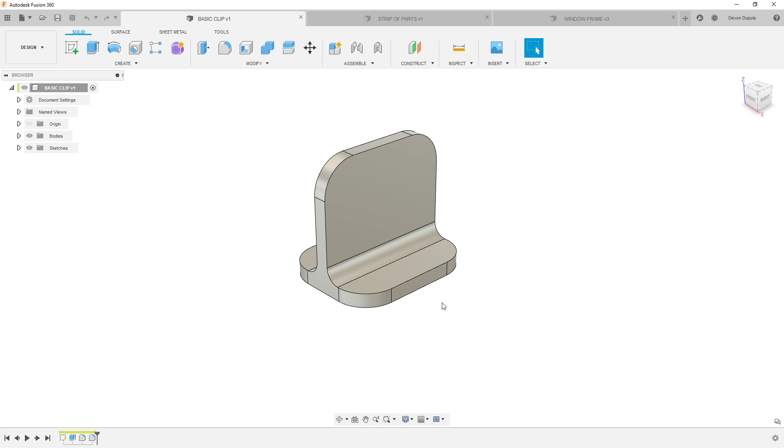Here on this first basic part, we're going to go through and I'm going to show you how to tab this. We're also going to walk through kind of how I would program this, because this is a pretty simple part. So once we get our part open, we just go from here to manufacture.

I'm going to hop in here and make a setup. Now this manufacturing method I'm about to do is really good if you don't have a lot of extra stock. Generally, when we're doing tabs and stuff like that, we need to have a lot more material, and that's the hold on the part. So we're really sacrificing, kind of making a fixture to hold our part, to get that ease of use to just make one or two parts maybe. This is a really good method for that.

In this case, I'm going to go here and set up my stock. I'm going to go to fixed size stock, and I'm going to have this round up to the nearest half inch. That way we get some clean numbers there.

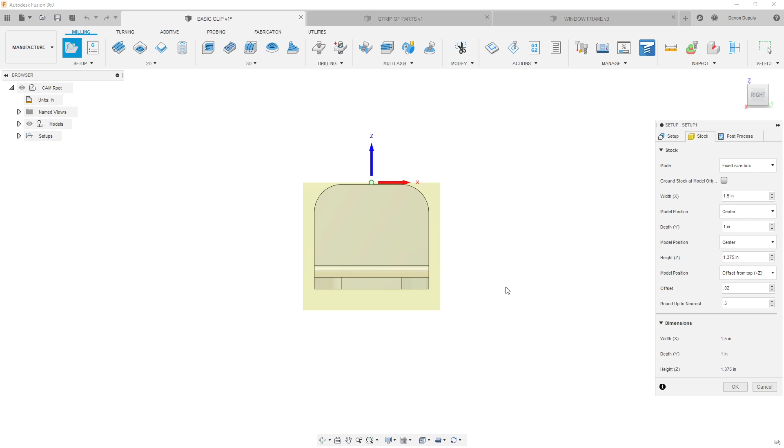Now what I want to do here is, if we don't have a lot of material here, maybe we could try 1 1/4, so maybe 0.25. You see we don't have much room underneath the part, so that really doesn't give us a lot to hold on with. We can make this like 20 thou offset from the top, and then we only have a little bit of material here, and we're going to try to work with that. We could bump this up to maybe 375, and that might give us kind of what we want. So really the goal here is to tab this part off and not use a lot of extra stock.

Once I have this all set, I'm just going to hit OK. How I would do a part like this is generally I just start off with a 3D adaptive, and I'm going to come in here and grab a tool that's long enough. I have some of my values already set in here, the way I want to machine this, and we can just hit OK on this.

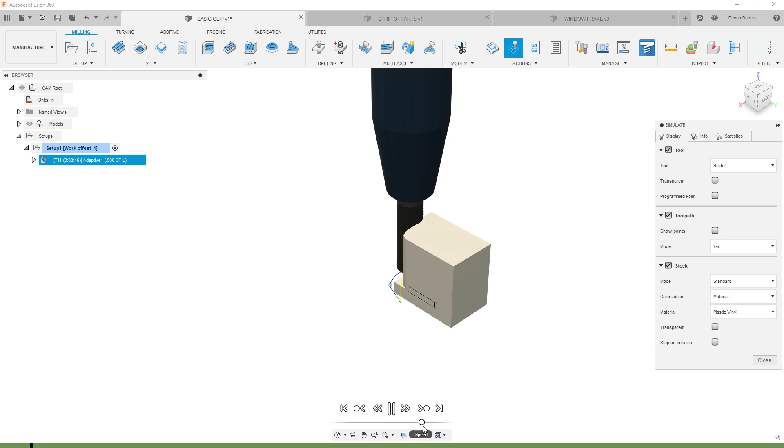This is going to kind of run around the part there. We can simulate this to see what our progress is if we want to take a look at that, and that'll give us a better idea of what we need to do next. So let's turn some settings on here and we can play through this. All right, so we're pretty good there.

What I would do then next is probably face this top. I'm just going to come in here for my stock selection and select this area just so we don't get a real big mess there. And then I do this often, and this is kind of a trick.

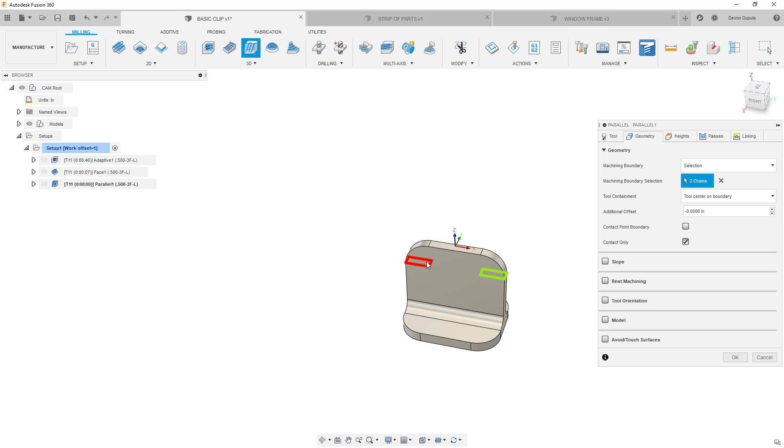These had a lot of material left on there, and I want to go in and finish these. I want to keep a constant tool pressure when I'm doing that. So what I'm going to do is actually use this parallel tool path, and I'm going to leave some stock on here. Let's come in here and leave like 10 thou. Then for my areas, I'm going to pick selection here, and let's grab this, and we'll grab this other side. We'll use contact point boundary, and we'll hit OK. We're not getting anything here, so let's see.

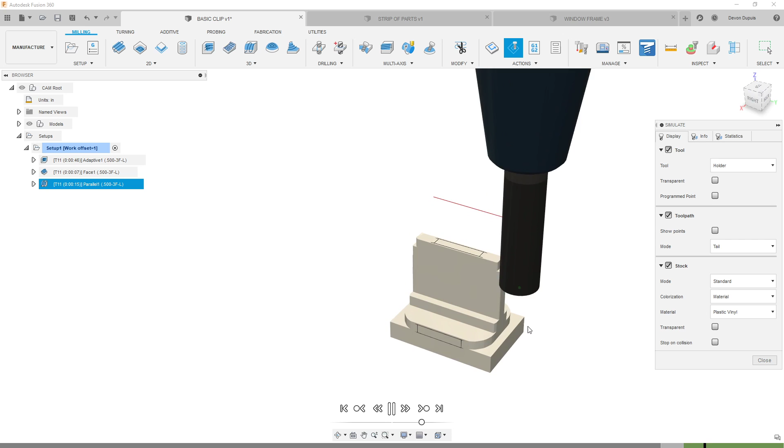So there we go. Now we've got a nice little rest roughing operation for our part. We can simulate that and take a look. Let's play through these - we can see this comes in pretty nicely and knocks off those big areas that we didn't have.

And then we can go right into finishing now. In this case, I'm going to use 2D contour to do this. We can come in here and grab this and this, and this and this. And then I want to make my lead-in be 0 degrees, tangentially extend these like maybe 100 thousandths. We can hit OK with that.

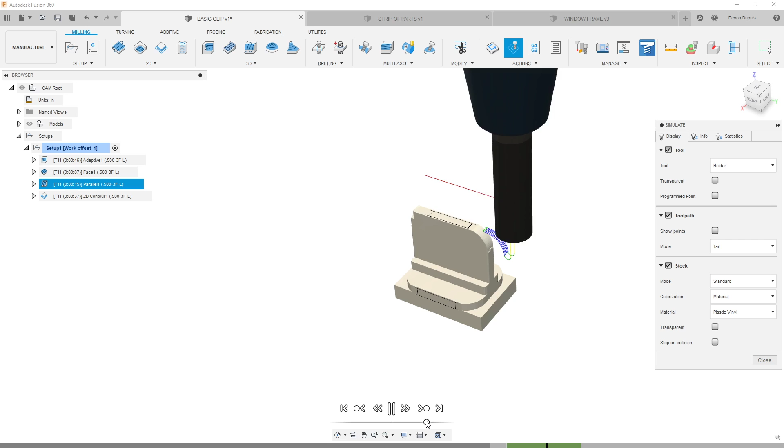That's good there. We can also add the outside for the bottom there. Now we can right click on this and hit simulate, play through these first parts, and then we can see our rest roughing. This is finishing those faces. And that looks pretty good there.

So the only other thing we might want to come in here and finish this. Now we can grab this and we see that we have a 125 radius. So if we have a tool to do that, we can come in here and grab that. Let's go with 2D contour. Let's just switch and we'll make a tool if we don't have one.

I'm going to grab this tool. Oops - what I want to do is modify this one, make this a ball nose. I'll just do 0.125.

And there we go. Then what I'm going to do here is grab this geometry and this geometry. And for my height, I want this to be on a selection, and I'll just select that floor. We can make this also 0 degrees.

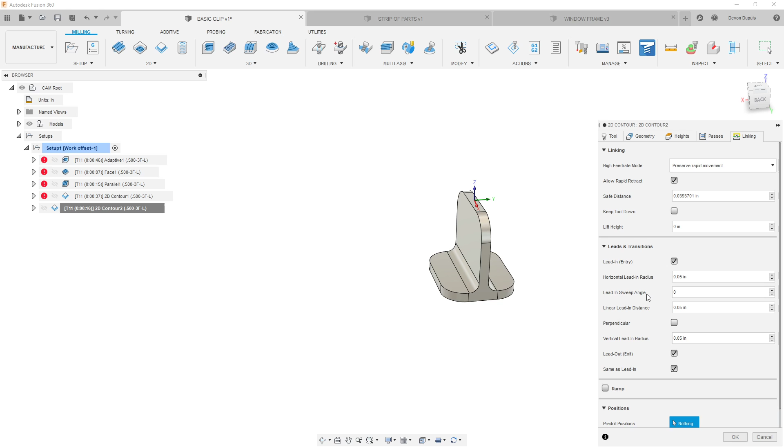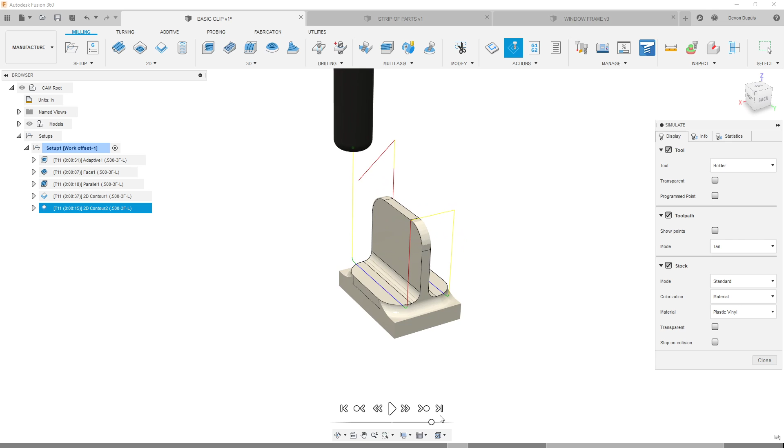So we can simulate this through then. And it looks like I swapped tools. So one of the things we could do here is let's go back in here - I edited the wrong tool, so we can change this one. One of the things that might be a little unknown fact here is I modified the wrong tool, so it added all of these, and I didn't do this on purpose.

But there is a pretty easy fix here. I can take this flat end mill, and we can see this one has a ball nose. When we expand it, I can actually take this tool and drag it onto these operations, and for every one except this last one here.

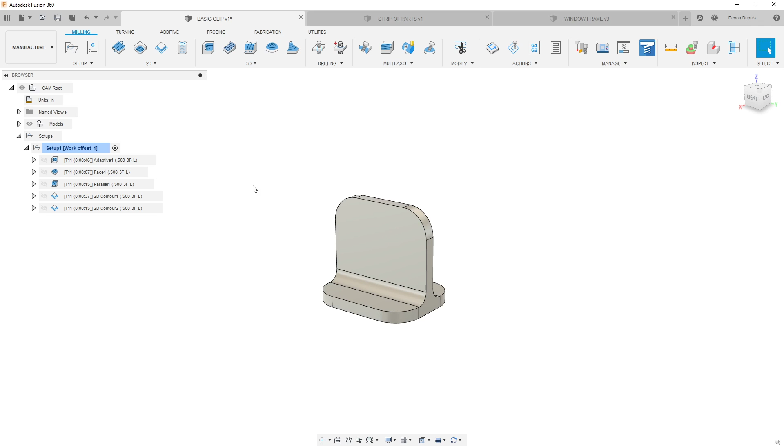So the only other thing we might need to do is just finish these sides. We can grab this parallel here, and I'm going to copy it, then paste it in the top window here, and that's going to drop it at the bottom. Then what I'm going to do - since I made all my selections already - is just change my tool. We'll take the stock to leave off, tighten up these passes to like 10, and we'll hit OK.

Oh, and that was the wrong tool, so we can switch it back there to a ball. And now, how are we going to cut this part off?

So a lot of times we'd need a second operation here. We need to flip this around and then remove the material that's remaining on the bottom. What I'm going to do here is a simpler workflow - I'm going to use a slit saw.

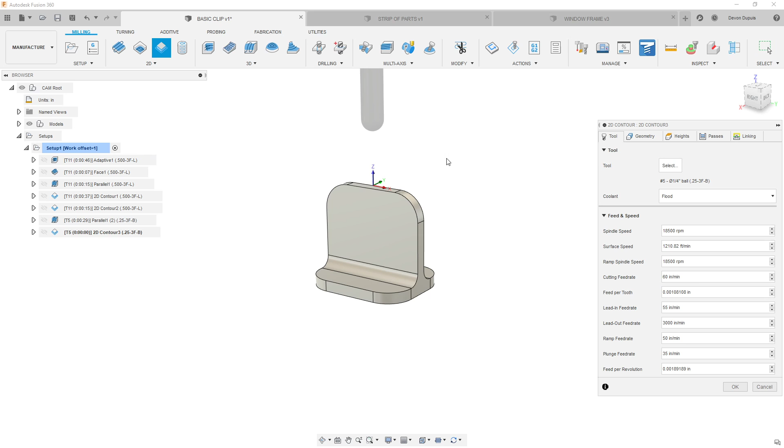So I'm going to come in here and go to 2D contour, and I'm going to do this one without making any geometry. Later you'll see me do one where we make some geometry. So in here, let's just go create new tool. I'm going to come in here and go to slot mill, and we'll make this like a 2-inch diameter.

This gets real funky real quick, so just bear with me. For a corner radius, we'll put in 0. For my flute length, we'll put in 0.1, and then I'm going to put in my shoulder length also as 0.1. I generally do this with almost all my tools.

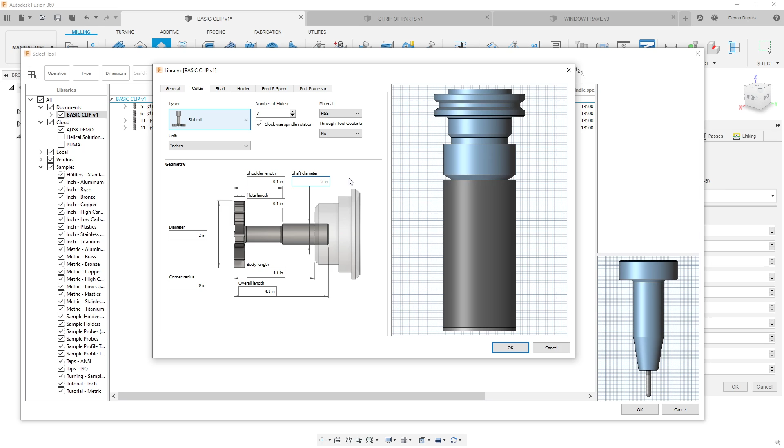For my shaft diameter here, we'll put this at 0.5. And then right here with this body length, we can modulate how far it sticks out. So normally I would measure from the bottom to the tool holder to get a number here. We put in something like maybe 2 inches. So that's going to give us a certain amount of cut room here to cut this off with a

slit saw. So in this case, I'm going to come over here and go to geometry, and I'm going to hold down Alt, and I'm going to select just these middle contours right here. Now, I'm also going to turn on stock contours, and we can take a look at this, but I'm going to turn on stock contours because this is going to extend those out to the ends.

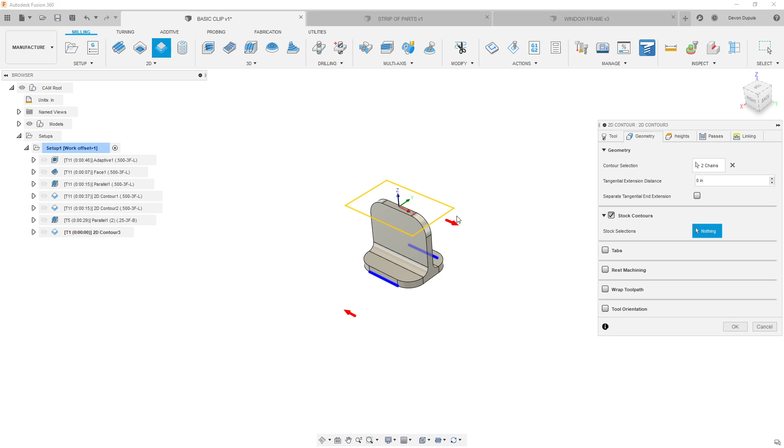And then under passes here, what I want to do is I want to turn on my stock to leave, and I'm actually going to make my radial and my axial. So my radial, let's just start out with maybe negative 0.5. And then for my axial, I want to make this how far down I want to make the tool flute. So our thickness was 100 thou, so I'm going to start out with minus 0.1, and we can hit OK just to kind of see what this does.

So we can come in here and hit simulate. We'll play through all of these and then we can look at this. And sometimes I turn this to transparent just to make it a little bit easier to see. And we're going to go to the side view here and we can see this kind of coming down and maybe I didn't, oh, yeah.

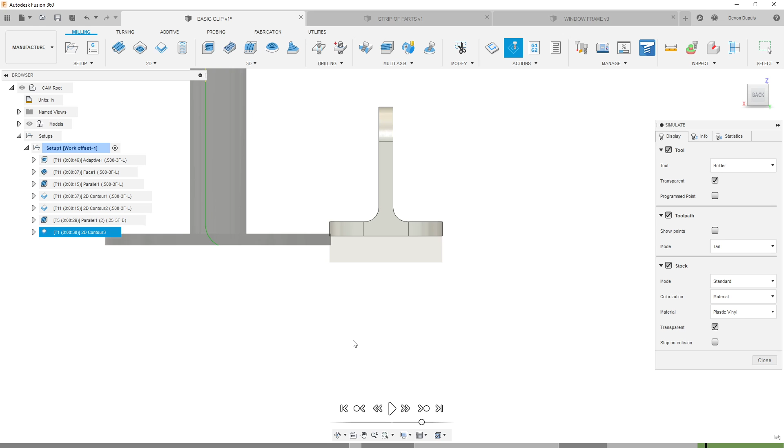So we can drag this on here and we can see this is kind of swooping down and that we're way out of the way here because of our tangential extension and we're coming into the part to kind of slit saw this off. That's going to retract and then come in on this side. Now, we didn't leave any material there, so I was just guessing there by my distance, and we will put all these files in the end. So this is 1 inch distance from side to side here, so my half inch isn't leaving anything.

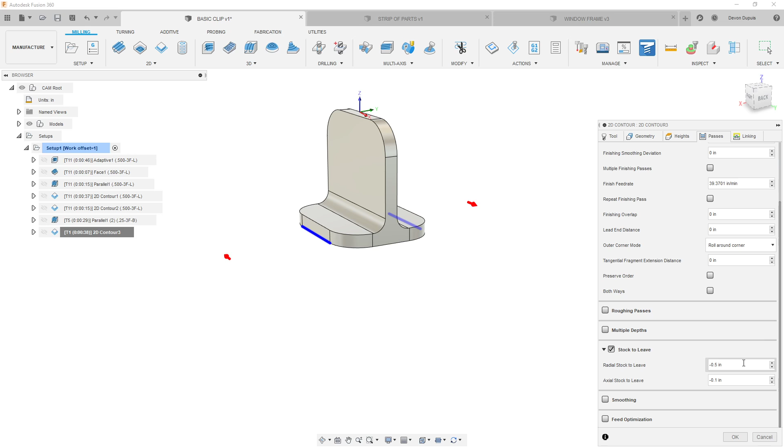Generally, in a part like this, you want to leave enough material that you can break it off, but not so much that I would need to go out and get a band saw or something for, and then I would just clean it up on like a Scotch-Brite wheel. So on our last pass here, we can go in and just modify this number to be something like maybe 490 or 495. And now we'll get kind of a little sliver in there.

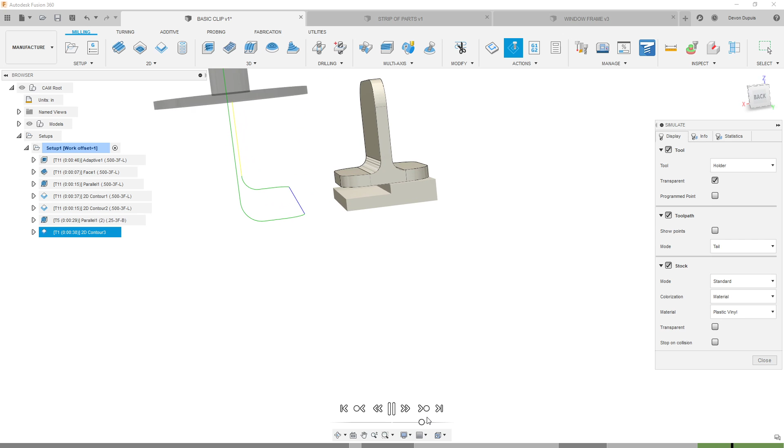So some other thing I might do is maybe take these out. In this case, they're fine because we're leading in enough. But if we simulate this to the last one here, we should be pretty much done, ready to go run this. And that's leaving just a little sliver in the middle there to kind of break this off. And this would be just one operation in a 3 axis.

So let's move over to kind of a strip of parts and I will save this so you guys have it at that point and we'll move in here. So a lot of times we get a little part like this and this order might be for 1,000 or maybe for 5,000. Instead of cutting up all those individual pieces and having somebody load them, what I'll generally do is do them in strips. So I have my body here.

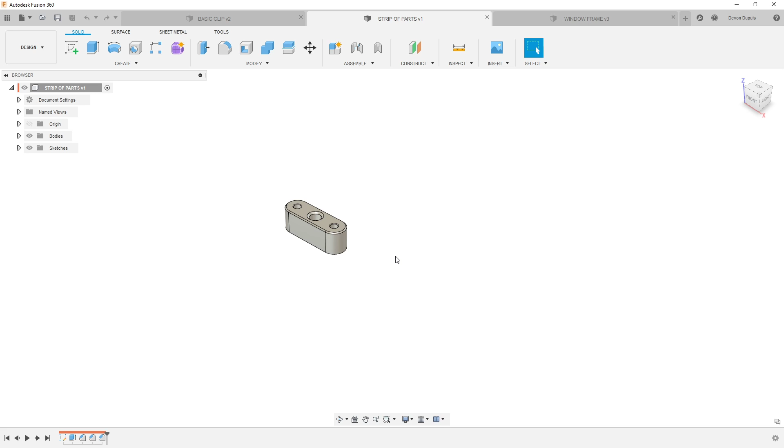I'm going to do this with just bodies. You certainly could make one body a component, and then pattern that. We have real simple geometry here, so I don't really need to do that for my programming. But again, I'm kind of thinking about the finish line when I'm starting, so I can make sure that I properly prepare for that.

So what I'm going to do is I'm going to come in here and create a sketch. I want to make my stock. You can just draw this rectangle out, and then we can add some dimensions here. We'll say this is maybe 1 inch, and maybe this is a little bit bigger than 6 inches. We'll make this like 7 inches.

So on a normal Kurt vise that's 6 inches wide, it will be hanging out a little bit on both sides here. And then what I want to do is hit escape there and kind of just position this. There's a bunch of different ways we could do this. I can draw a line from here and snap that there, and it's still kind of crooked. So a lot of times I'll just grab this and say horizontal/vertical. And then we could actually give a distance here.

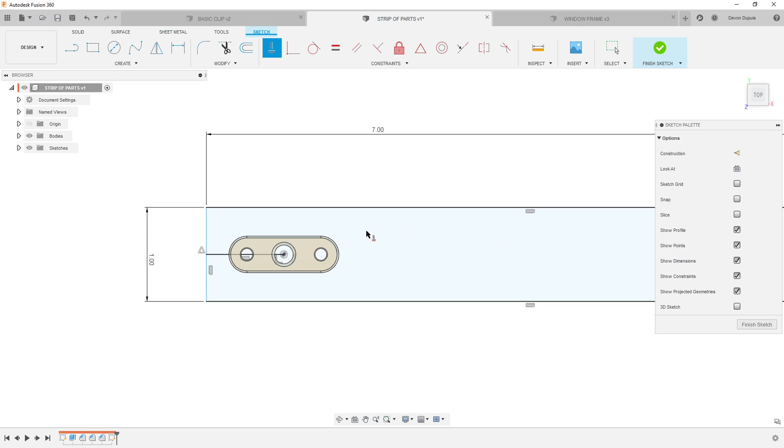One thing you might notice is we didn't select a face here, but I also have auto project geometry turned off, because a lot of times the sketches I'm making are for manufacturing and I really don't want to dump unnecessary geometry into there. So that's why you'll find I don't have any point here to snap to if I want to give an actual dimension. So in my case, I would hit P for project and grab this.

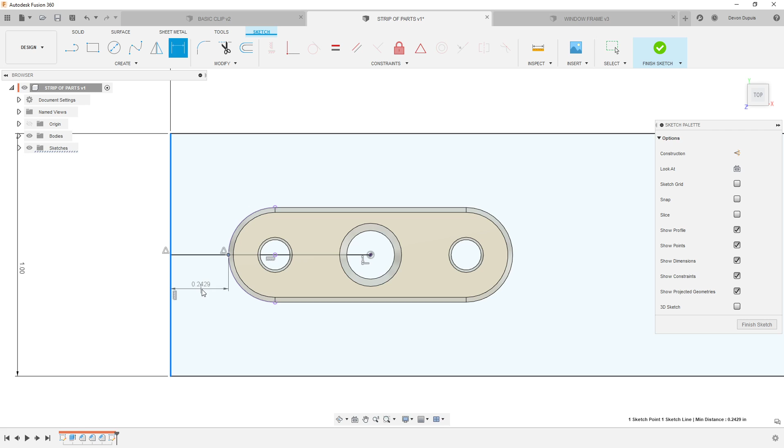Then I can either just dimension from this line to maybe a point that we don't have, so we'd have to drop a point on there first. But again, I'm not getting a bunch of unnecessary geometry that I don't need. So I can hit dimension to this, and we can make this just like 50 thou or something. And then I'll hit finish sketch. We can hit E for extrude.

On this, I'm defining my stock first, so I'm going to be drawing my stock. In this case, I really want to have two sides because they're not going to be symmetrical. So on this side, we're going to go down, we'll make this 0.250. And then on this side, we'll go just big enough to go above the part, so maybe we'll make this 0.5.

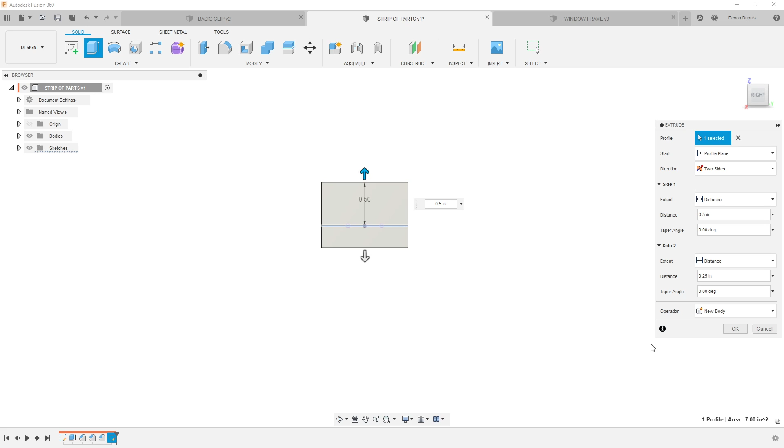Now that wiped out my part, obviously not my intention. So I'm going to come over here and just say new body, and that'll just dump a body in there. So now I have that body and I can hit OK. I generally then expand this out, take the second one, my stock body I made, and we can name it. And then the next thing I pretty much always do is go to opacity control and make this 50%.

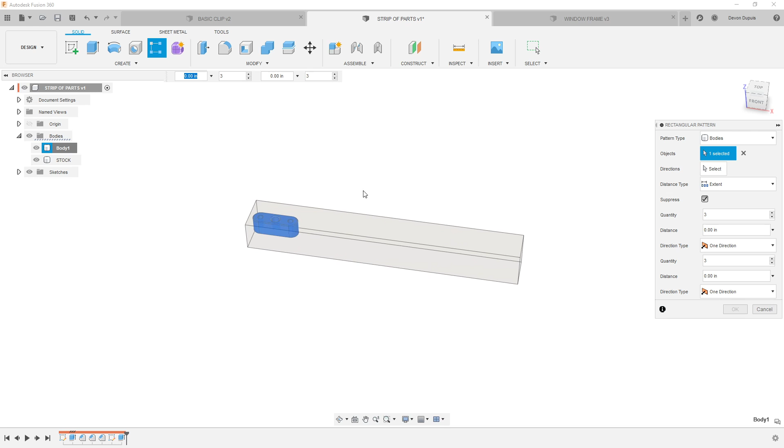Now I'll grab this body and what I want to do is make a rectangular pattern of them. The reason I want to have all the bodies is because when I go to cut this out, if I did make some sort of pattern to rough this out, it would only be for the one part. Really on my setup, I want to make all of these parts. So I'm going to do that now by patterning these bodies. We can say body, pick the body we already did for a direction, grab a dimension here and just drag this out.

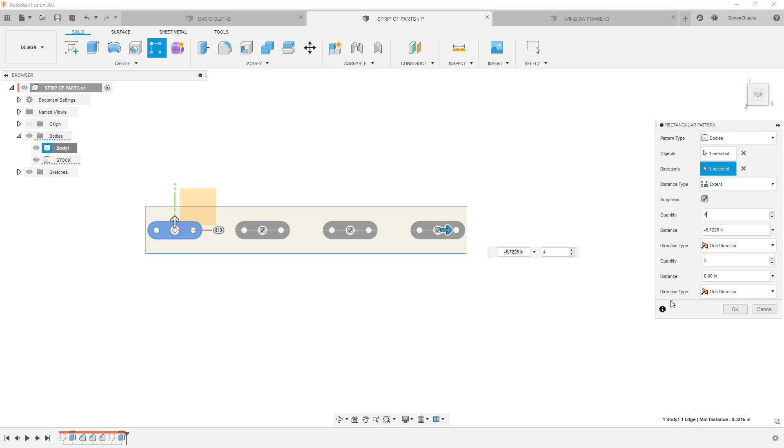Generally, I know I'm going to cut these at 7 inches, so we can just modify this. I want to have enough of these on here, so we'll probably put four. I want to have enough, but I also want to make sure my tool can fit in between here when I'm roughing this out. So this would probably be as much as I want. I know this is probably a little wasteful, so we might have wanted to get a different size, but we're going to go with this. I'm going to hit OK here.

So the last thing, we could do this also without having any of that geometry, and we probably will, just because I'm not a big fan of making another sketch on the bottom of these to drive my line. So from this point, we're pretty much set up. I'm going to go straight from design to manufacture and create a new setup.

Now it gets a little messy in Fusion when we have multiple bodies, so I have to come in here and select the bodies I want to work with. I can click and hold on this and come through here and pick these bodies. But generally what I would do to make it simpler is just turn off my main stock body and then just pick these bodies here.

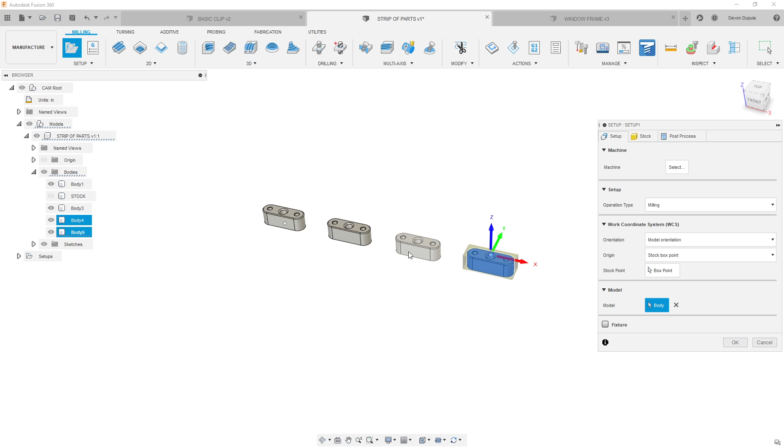For my stock, then I would just go from solid and I would just pick the stock. We could put this kind of wherever we want. When I hit OK, it's going to turn everything on because I have my sync visibility turned on. We'll go a little bit into that on the next part.

But the first thing I want to do here now that I've defined all the bodies I want to cut is I want to rough this out. So I'm going to come in here and go to adaptive clearing. We'll go straight to a tool and let's first try a 1/4 inch. That should be, yeah, that'll be plenty.

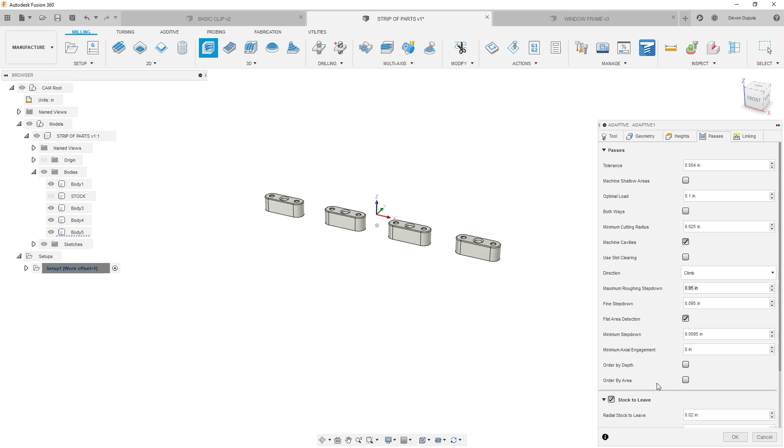Again, my settings are kind of parametric. I have these linked to my tool. So if we say edit expression, you guys can see what I have in there. Tool flute length times 0.95 gives me about 95%. And in this case, with a 1/4 inch tool, that's probably a little ambitious with that 100. So I'd probably make this maybe like 50, depending on the machine I was running it on.

And then here we can come through and rough this out. And we can see this did a really nice job of doing all of the parts, right? So if I would have made a setup with a single part and tried to pattern this, I wouldn't have got the same result because it just would have ate up all this one material. And then I would have tried to pattern that a bunch of times. So really, again, thinking about kind of our finish line when we're starting is always good.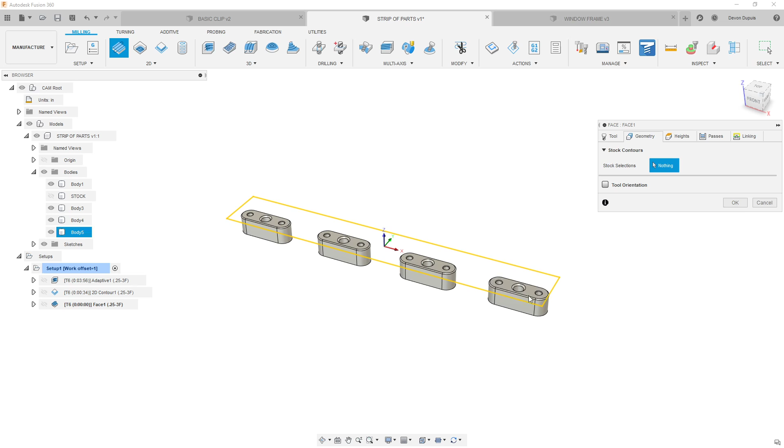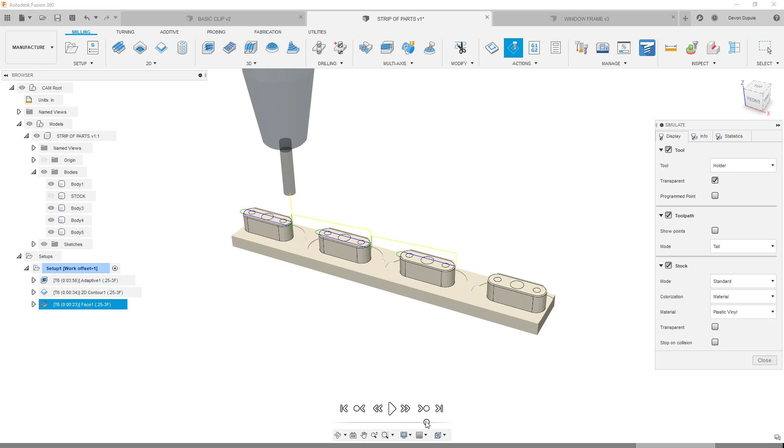So in this case here, let's just go around these parts with the same tool. Hit OK, and we can also come in here and do like a face. And we'll grab just these tops. So we can simulate this now, and I'm probably not going to go through and drill these just because everybody hopefully understands how to do that. But this is going to come in here and kind of burn these up, doing the outside and then facing off those tops. So we could then drill the holes or whatever.

And one thing I'd probably do on this adaptive is I would drop the height here negative a little bit more than my cutter. So it's going to leave 20 thousandths by default, which is what we have set here. And that kind of stacks. So I want to keep that in mind when I'm putting in this number. So I would say below my model, I want to go probably about 150, minus 0.15. And then what that's going to do is just go to about 130 because we're going to leave 20, and then that'll leave enough room for my saw.

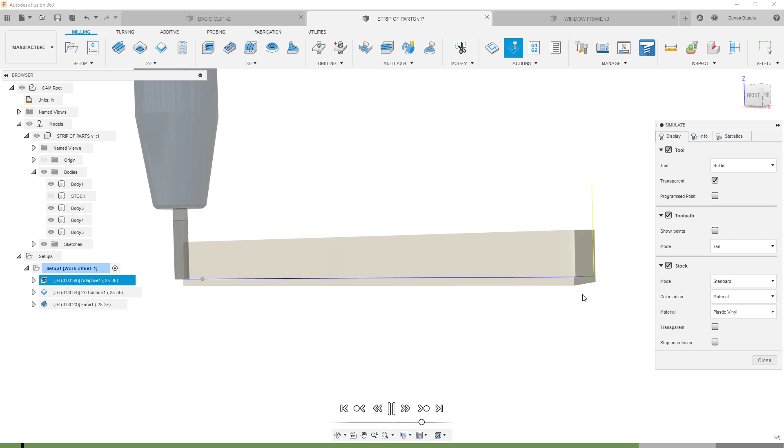Now I always want to be cautious when I'm doing this of how much material I'm clamping onto. So I would really want to pay attention to this and either make a set of soft jaws if I don't want to cut into my hard jaws obviously, but set up a set of parallels or something to hold this kind of accordingly to that step. So again, we're pretty good here. And I'm going to actually use that same method.

Now, one of the things we could do in Fusion that I've done often in the past is this toolpath pretty much does what I want. Has my tool, has all my settings and everything. We can right click on this and hit copy. I can just come over to this setup and I can right click on here and hit paste. We could do this also with like a template or something like that, but you can see my stock contours are already selected in here for me.

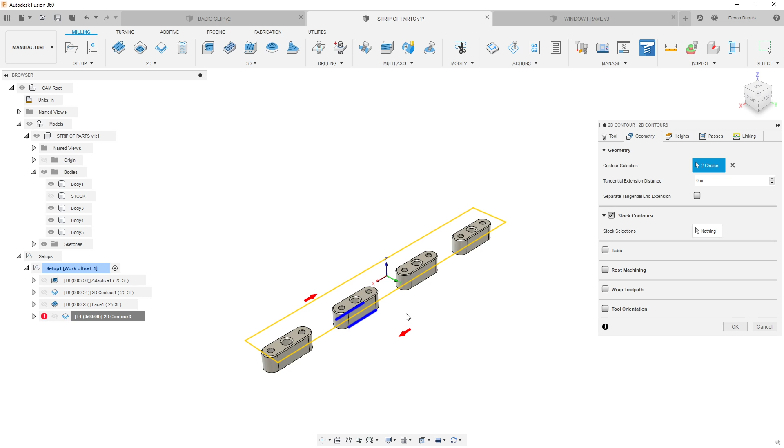So really I just need to select these lines here, and I'm just holding Alt to do a single selection here. And then one thing I don't know is how wide my part is. So we can just hit OK. This is probably going to either fail or not cut enough, but what I want to do is get a measurement from this side to this side. So we're at 390. So I want to be a little bit less than half there on these. So, one second.

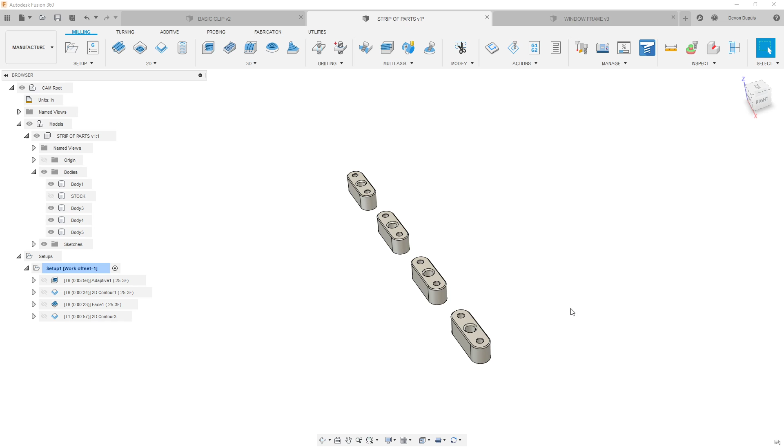So half of 390 is 0.195. And what we could do is just go to probably like 192 or something like that. Again, depending on how much runout your slit saw had, you could adjust that. But that gives me my number here. And then for my radial stock to leave, we can say minus 0.192, leaving my axial alone because that's the height of my slit saw there.

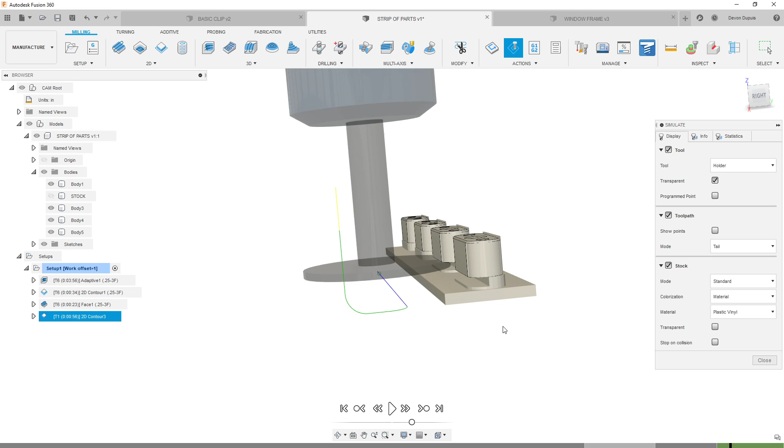So now I can come in here and hit simulate, and we can play through these, and we'll go to this kind of slit saw pass here, and then we can play this, and this is going to come down and cut through those. And I wanted to play this a little bit slower, so we'll drag this through. So this is going to come through there, and it looks like we've got to fix our facing pass there because we didn't get enough passes. And then this is going to come through and buzz and just leave a little bit of material underneath there for this slit saw technique.

So let's come in here and fix this facing pass. And all I would do generally in a situation like this is just with my stock offset, maybe give this like a 0.125 or something like that. And then we should get multiple passes. So now when we simulate this and just play to the end, we see that that face is cleaned up. And obviously we didn't do the chamfers of the holes, but you guys get the idea. So let's move on to our last

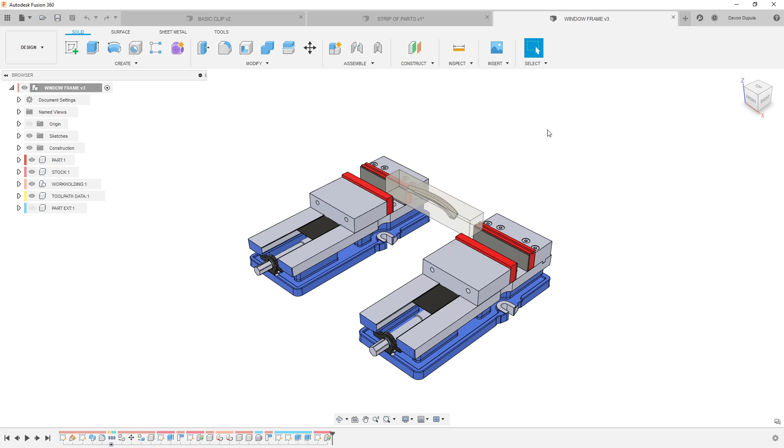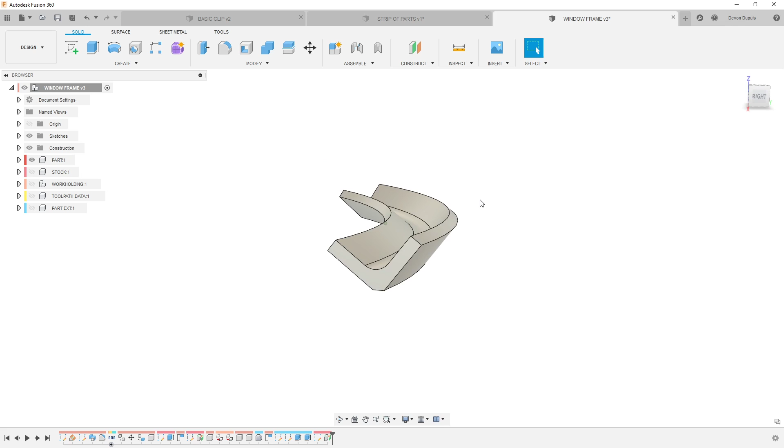part here. Now, this is kind of a strange part. And the reason I kind of picked this, and we'll turn off the stock also, it's just because this is a part normally that would be really, really hard to hold on to in like soft jaws or something like that. It's curved. Obviously, we can't clamp it on the bottom because it would just push out. Clamping on the top, we might be able to get a little bit of force here, but generally, if we're making a lot of these, this real sharp corner on there is going to kind of eat up our soft jaws.

So what I've done here is I did the least amount of prep work I could without making this seem super ambitious. But I just added some vises in here. For me, they're parametric. So I just typed in the spacing, I put in my stock size, and then I just kind of placed my part in the middle here. And then on my stock, I added a couple construction axes that are through kind of the center here, because essentially what I want to do in a part like this is square these ends so we had a good spot to locate off of, and then I would just flip this twice.

So we could even do this just by cutting a little area of this right here on this first operation and then flipping it around with a face top. That way it would be square and everything like that. But we'll just pretend that everything's kind of already squared up here. So I haven't done anything for the toolpaths or anything yet. But what I want to do is I do need a boundary, right?

The other thing I did was I did make an extended part. So essentially, what I did is I just copied this first body and I pasted a new one. So I came here and I said copy. I went to the top and I said paste new. That means it's a different component. And then I just put part extended, and I abbreviated it. And then what I did was just made a couple sketches and I pulled these out tangentially because I essentially want to make one side as much as I can and then flip it around and do the back side, and then I'm holding on to it at the ends of these vises.

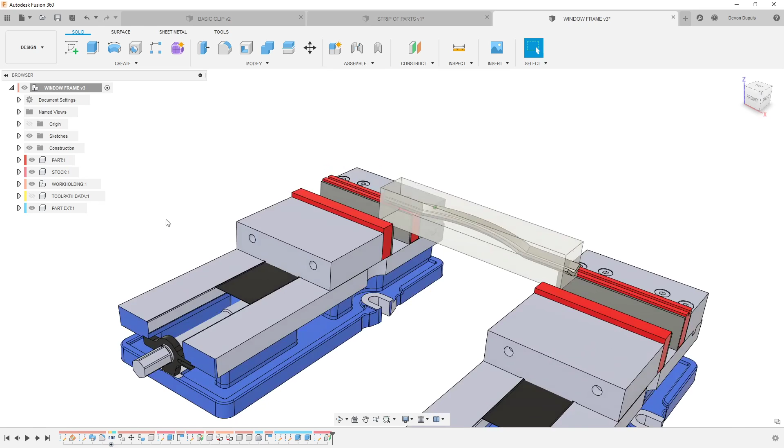So I do need a boundary to do this. I'm going to come over here in my toolpath data. And I like to keep this organized. So I kind of put these empty components here, also like containers at times. So you see in my workholding, I actually have two vises in there. And what this allows me to do is, if I'm activated on this main level and I want to turn off my workholding, because I placed them in this little folder here, I can just turn off my workholding.

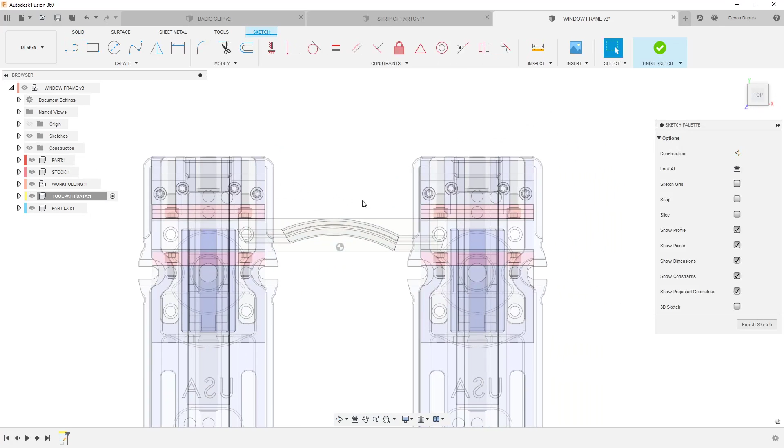So I know we don't have levels or anything like in Mastercam, but I've used this for a long time, almost like levels to put parts or different situations and empty components like that. So under toolpath data here, I'm just trying to keep this organized, and I'm going to go create sketch. I'm going to create that sketch on the top of the stock here. And then I'm just going to draw a rectangle, and we can modify this later.

I want this to be big enough to not dip down below my part here, because I want to rough out kind of this area, and we'll use this same boundary for both sides. So here we'll say finish sketch, and it's turned off just because that's turned off. And then I hope that's all I need. I'm going to go straight from here to manufacture.

One of the things you guys will notice when we get to the second side is that I have this synchronize active view setup, I have both of these turned on. What this top one does is synchronizes the view, so basically gives us kind of this home view of our X, Y, and Z, like we see it now. But when we flip to the backside and we activate that setup, it's going to flip it around, and then with the sync visibility, it shows whatever's kind of pertinent to that setup.

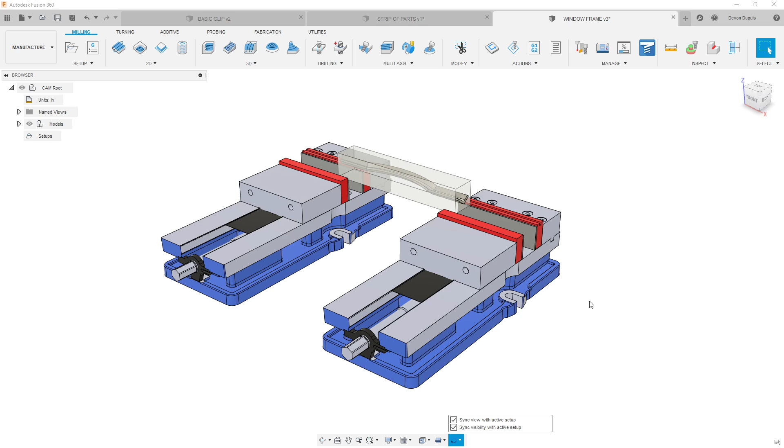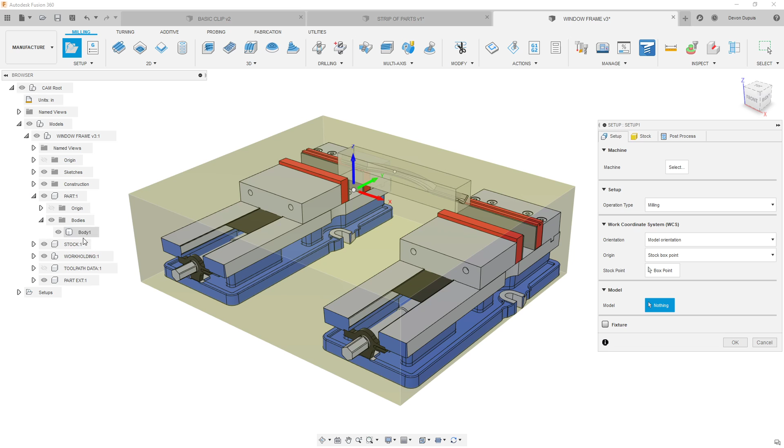So here I'm going to go to setup. Again, we have really messy selection here, and a lot of you might not understand what we're selecting here because we have so many bodies, and I do have two different parts that I want to work on. In this case, we're going to use the part. So I'm actually going to use this. And then in my fixture here, another nice thing about having it in that component is I can just check my work holding one, and it actually selects all of those things that are in that component.

For my stock here, we'll go to from solid. We can just pick this solid here. We can place our position kind of wherever we want. So if we wanted to put a stop in here and this was squared off, we could put this at the center, or anywhere there, and we should be good. So when I hit OK here, the first thing I want to do is turn off those origins because those are a little gnarly. So we'll just turn these off. And then I want to turn off my stock.

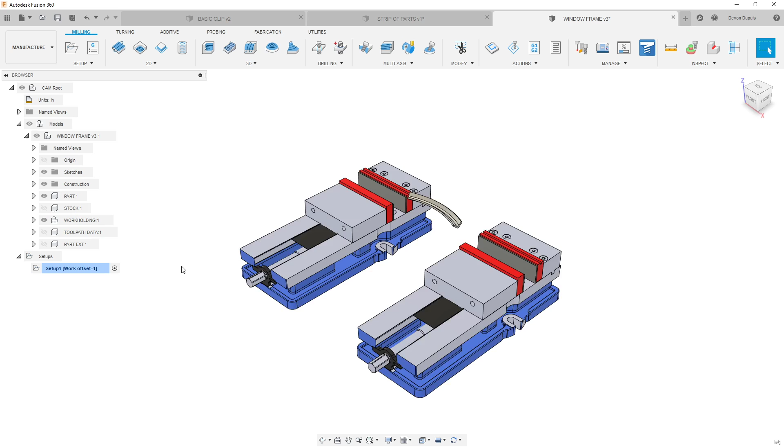So getting into this part here, we'll probably again go to this adaptive clearing, come over here and grab this long end mill here. And then for my geometry, what I want to use is a selection, and I'm going to use that sketch that we have in toolpath data. And I'm just going to select the sketch level instead of turning it on and selecting it. That way, if there's any boundaries or anything in the future that I add to that sketch, they'll automatically be selected in this toolpath. So we'll close that out. In this case, I want it to be inside the boundary because that's how I drew it. And then we can just hit OK and see what it does.

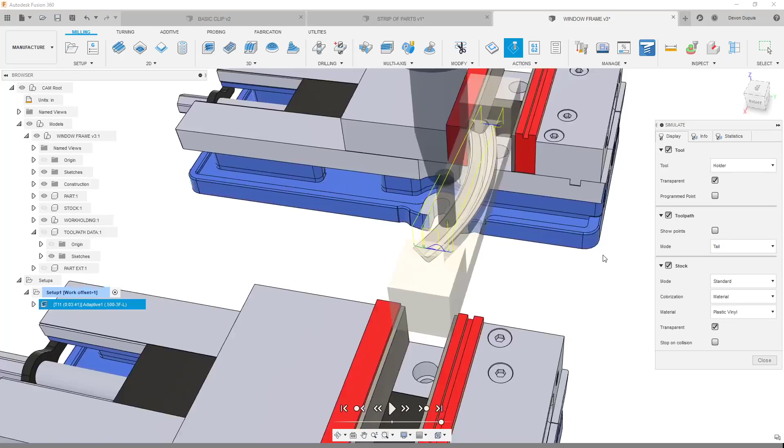Now, with the boundary that I drew, I hope it doesn't kind of hack out the sides or the ends here. And we might have to modify that amount, but I'm going to right click on this and I'm going to hit simulate. And we can play into this and see kind of where we're at. So that looks pretty good for starting off. Really kind of captured what I wanted here. I probably would bump this out a little bit. And let's actually change that.

I'm not going to change my sketch, but I'm going to do two things in here. I'm going to go into this adaptive, and I know I'm going to stretch this out so it's going to waterfall along the edge here. So I'm actually going to change what model we're working on. And I'm doing this a lot. I do this often to avoid geometry, and there's a lot of tricks we can do with this, but I usually turn off this include setup model just because that geometry is also in the part we're working with here. And then I'm going to pick this part.

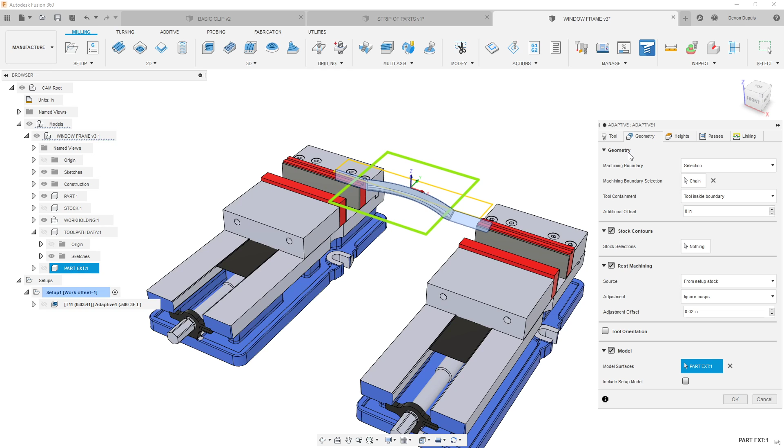And then for my geometry here, we can just give it an additional offset. So again, hovering over anything in Fusion will give you this nice pop up here. So you can see I have it set to inside boundary, but we can also offset that.

So I want to go out, enough to not affect my part. We could change this to tool center on boundary, and give this an extra 200 thousandths. We'll hit OK and make sure that doesn't come close to our vices, but I think we're safe.

So we'll come in here and hit simulate, and play through this, and that kind of looks like what I want.

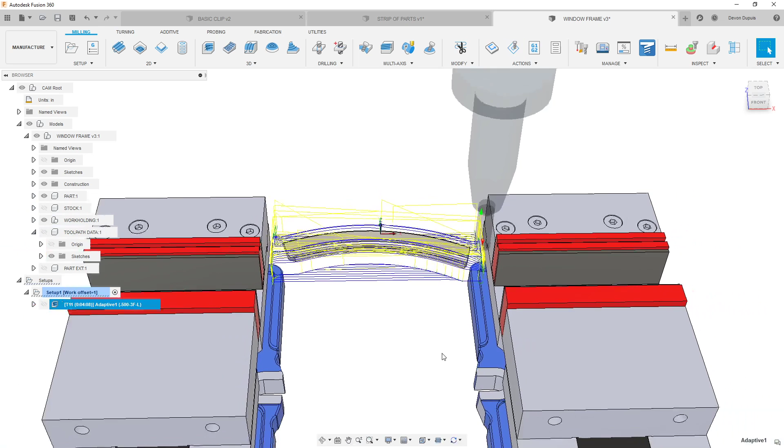So I might take this and duplicate it, because we have some tight areas in there, so I'd go into the second one and change the tool. Then under geometry, I'm going to go to rest machining, which is turned on, but it's really from the stock setup. So if I hit OK right now, it's going to repeat all the work the bigger tool did. In this case, I want to go for previous operations, and we'll hit OK and see if we get any.

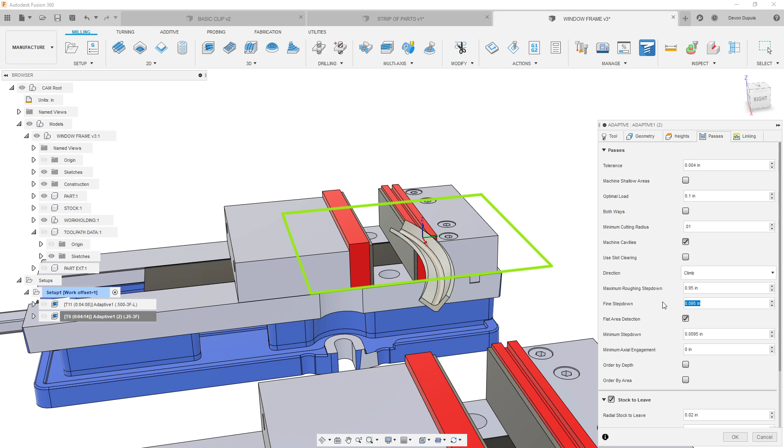We should get this to go inside the middle there a little bit, and it looks like we're not. So a couple settings that could help us out: there's a minimum cutting radius here which is pretty small, we can put this to 10, and also with this fine step down, we can make this something like 20 for rest machining. That should give us a little bit more definition.

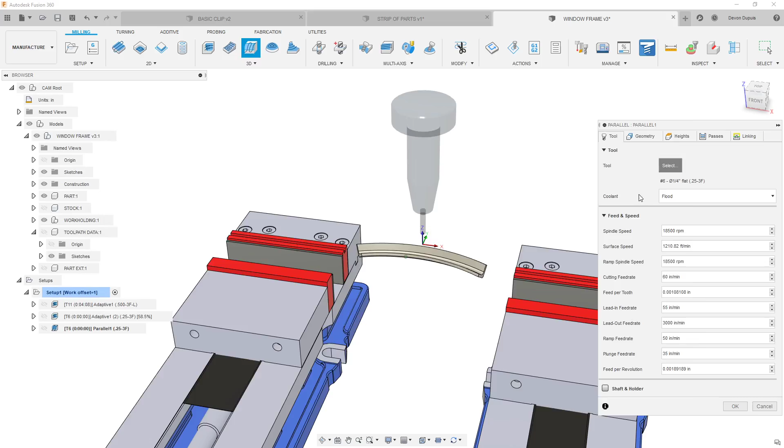We don't have to wait for that to generate, we can start working on our finishing passes. Here I'm going to go to a parallel—actually not a parallel, because this kind of swoops back and forth, and we could do this whole top in one operation. This might work, this might fail.

Blend I would use for this, and then we can switch to this quarter inch ball. In this case, what I want to do is pick my drive surfaces and then pick the curves I want to morph from.

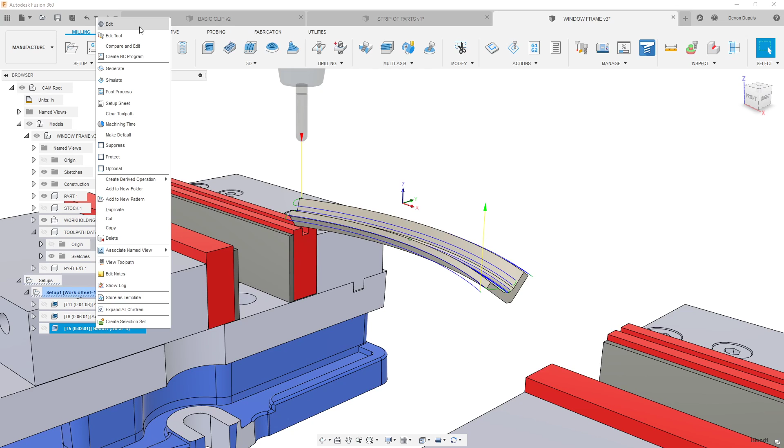And I want to go from here to here. With my step over here, let's put in 0.1 and just see what it looks like when it generates. Not too bad, so I'm okay with trying to tighten it up. So we put this at 0.008.

And we can take a look at this, it shouldn't take too long. Simulate these while that's going. And we'd probably want to do some sort of rest machining because we're still not getting in there from the ends.

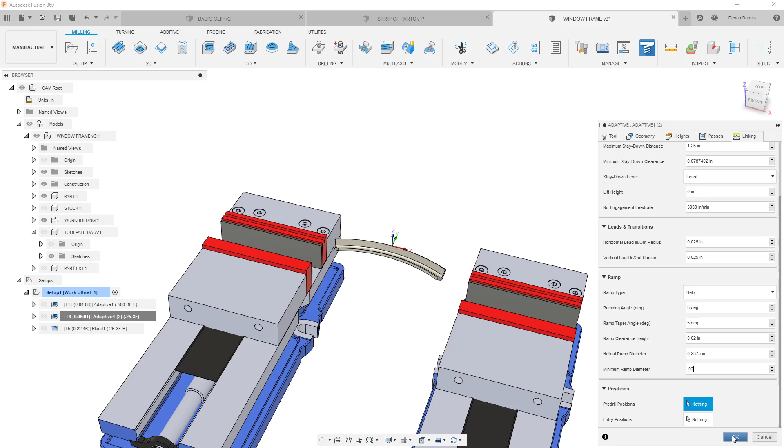It looks like there's one more setting we could affect here under linking. This minimum ramp diameter, we could set this down real small to something like 20. And now it's going to probably try to helix into there just because that diameter was probably too big before. That looks pretty clean.

So we can simulate these two while that's going. Let's simulate. And we can check out our finishing here.

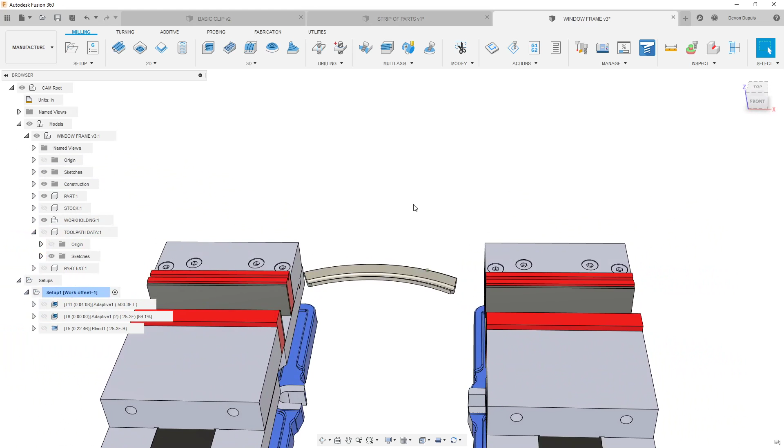So that looks pretty good. And then I'm going to work on the tabs on this. So really what I want to do is like a 2D contour, and I'm just going to cut down about halfway on here. We can use whatever tool—we'll use this bigger one.

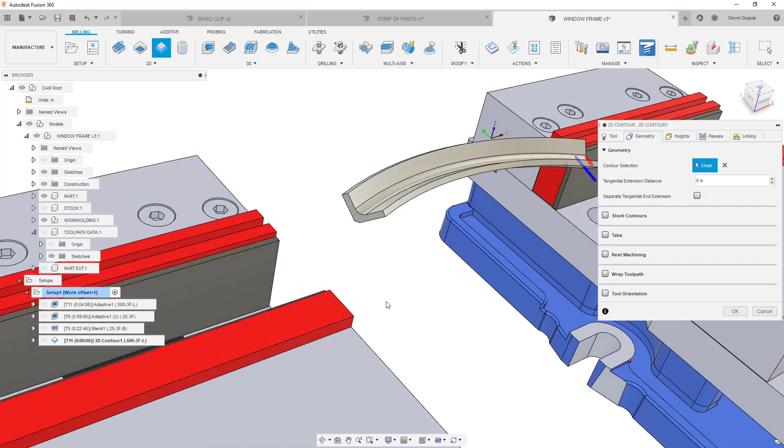Go to geometry here, and then from the top side, I'm going to hold down Alt and pick these contours here, then hit accept. Then I'm going to hold down Alt over here, grab this edge, pick this and chain that together. In this case, I do want to go a little bit past here, so I'm going to put in like 0.15.

Then for my heights, this is where it's kind of important. We can pick like from a face, so we'd have a reference. So what I might do is just say from selection, grab this, and then we could actually lift this up by maybe 0.3. See where that is—maybe I like 0.25. And hit OK. But now we have a known face that we can use for the backside here.

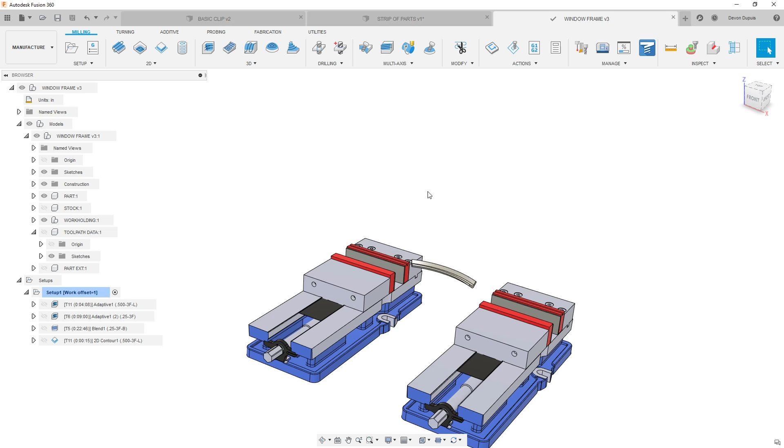But let's hit simulate here, and we'll play through this. We could actually just hit pause and say play to the end. And it's generating there, kind of doing its thing.

Can you guys hear me all right? Can you hear me better, Wayne?

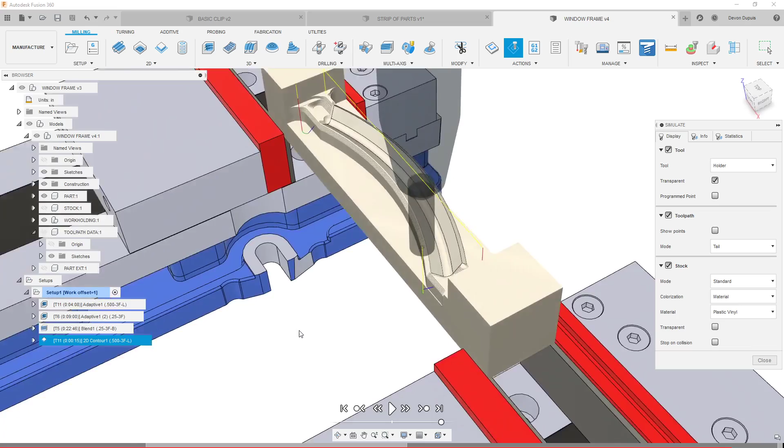All right, so it looks like everything generated there. Now, this is something they're definitely working on in Fusion to make this a little bit better. But this is how I would do this in the past, and I feel like it's relevant to show this.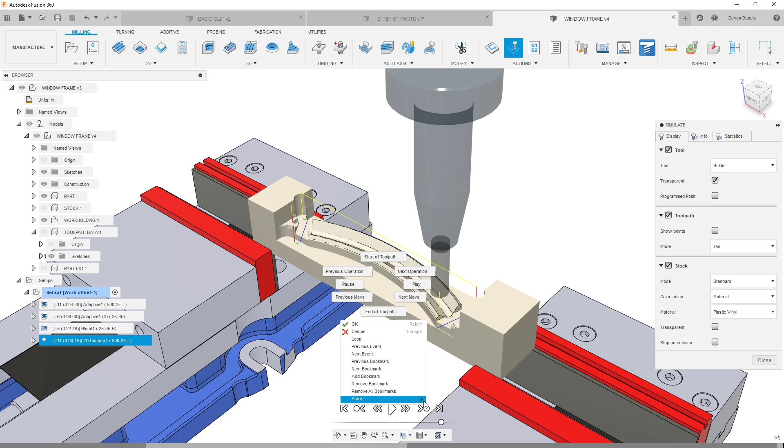I right click on this, and I'm going to go to stock, and I'm going to say I want to save the stock. I'm just going to save this to my desktop, and I'll hit close here.

Then what I'm going to do is pop back into manufacture. Here's a little tip. I know a lot of people go between design and manufacture a lot. If this is something I already ran and I'm ready to set up the second side, what I usually do is protect this. Usually when I see these little lock icons, I know this is safe because I've already ran it. Then I'm going to go into manufacture here.

And when I insert this and go back now, we won't have all those invalidations and need to regenerate. So I'm going to say insert mesh. This is generally what you would want to do. You wouldn't want to upload this and then link it back into Fusion. That's going to open up that mesh.

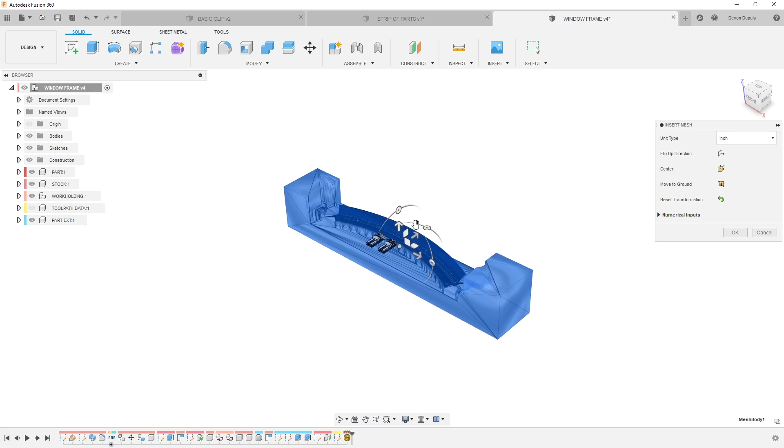Now it's actually really big. So you can see my vices there and we can see the mesh. This is because Fusion exports in centimeters, so we just need to set this back to inches and then it'll correct the size for us.

What I'm going to do, just so I can visually see this, is use this stock for my second side. And then I do need to have these vices around there, and that's kind of why I made this axis here.

So what I'm going to do is take this work holding, and I'm going to say copy, and then actually paste a new one in here, and we'll rename it. We can name this op2.

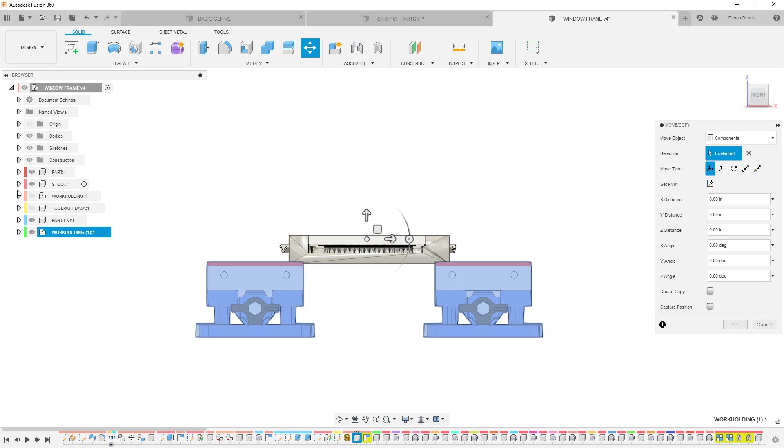So now there's two sets of vices in here, and really with the second set, what I want to do is right click and say move copy. It looks like that's not in the center, so...

Let's see if we can move this manipulator. So I just locked it to that axis there, and then all I need to do is really just rotate these 180. And then now they're on there for the second side.

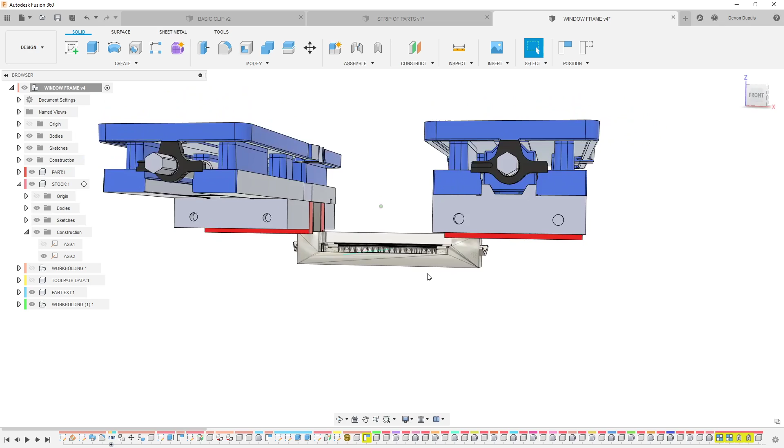So I have two sets of vices in here now, this set and this set. And when I go to make my second side, we'll go back over here to manufacture. I'm going to say I want to make a new setup.

Again, I can take my fixture and choose my op2 here for my model. We're going to use that same part. Then for my stock, we're going to set this to from solid. Even though this is a mesh, we're going to use it as a solid.

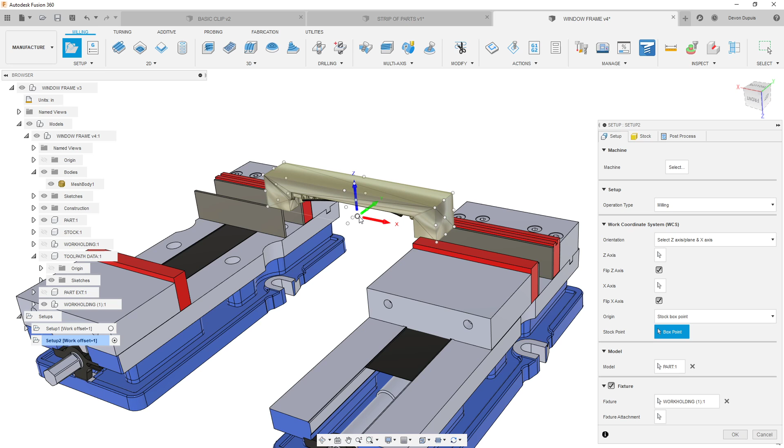We can flip our coordinate system here, pick up off of whatever. Could have blasted a hole in the end here and just probed that. But again, if you would want these ends to be squared, you could rotate these accordingly. We could just pick up top center right there.

So on the second side, we can kind of reuse some of these operations here. I might even take all of these and just hit copy and paste them in here just to kind of speed up my workflow. And then I'll just grab the setup and say unprotect.

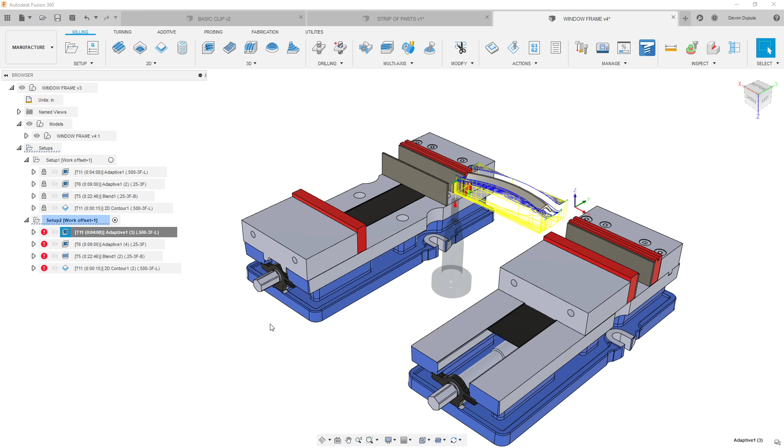And now with this one, all we should have to do is just hit generate. It should keep all of our settings and our components and everything like that. We're not going super far down below the model, and with this one, we don't need that rough roughing for the inside.

And then for this blend, I'm going to repick these for the other side. For my drive surfaces, again, we'll just pick this. That one's flat, but we'll surface it anyway. And then we'll grab this and this, and we'll morph between those. Let's just set this a little bit bigger so it doesn't take as long to generate on the stream.

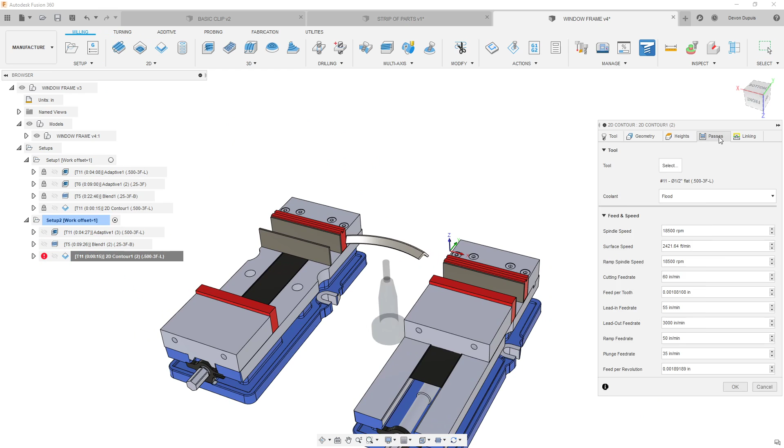And then for our contour here, because we drove off of that again, we can come in here and just go to passes. And then for my stock to leave, actually we can just leave that alone. We can just adjust kind of what this measurement is, so we know we cut down by that amount the last time. So I want to say maybe minus 0.235, or we'll say 240.

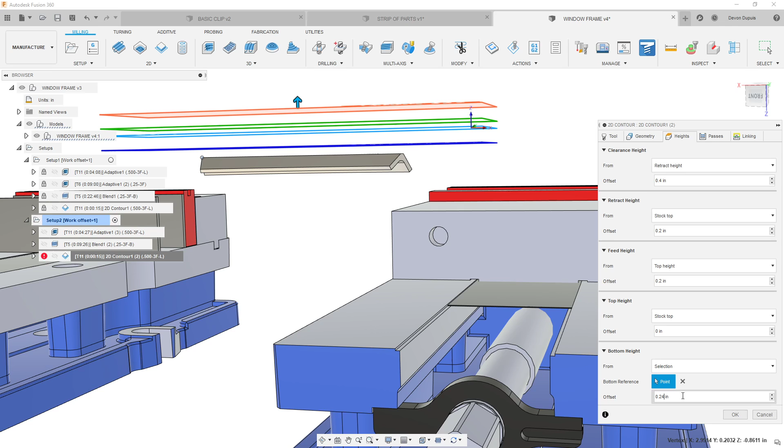And then we'll make this negative because our other offset was positive. So that should be pretty much it. So let's right click on here and hit simulate. Oh, don't do this. And we're good, so we'll hit play.

And this is going to play through doing that side, roughing this out, and we'll stay connected there in those areas. This is going to come through there and finish that. We'd probably want to come in there and clean that little piece sticking up.

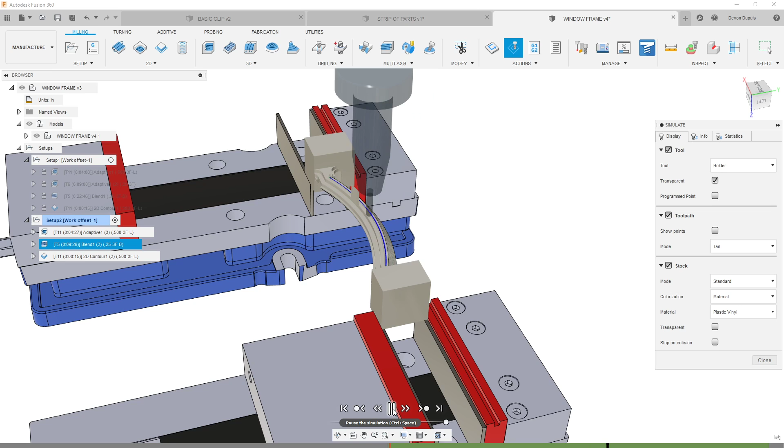And I'm just going to pause this and hit play to next operation. So this is going to generate all the way through there, and then we can see kind of the tabs here. So we got that piece, and we're kind of holding onto it just by these little areas here.

And again, obviously this isn't multi-axis, but this would be a really good workflow for just a regular 3-axis machine here. And then when we play through this, we might want to just do a ramp or something from the top, because just taking a single cut would be fairly ambitious here in the spot.

But you can see we're holding on just by those little tabs. We could break those off and just clean them up. So if I wanted to put a ramp in there, I would just go to this linking tab.

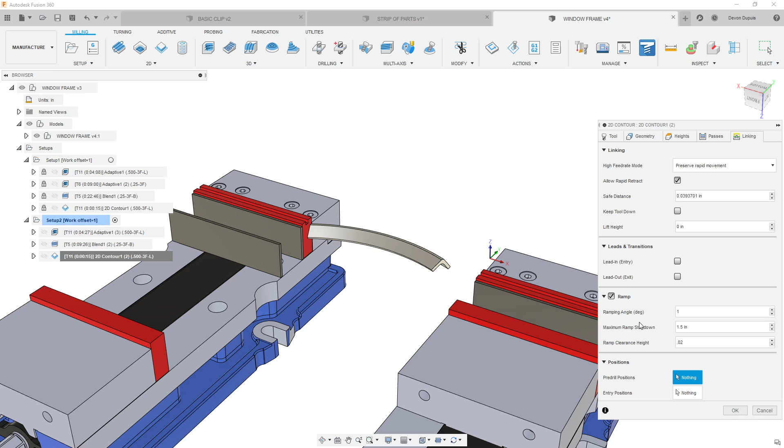Generally, I'll turn these off when I'm doing a ramp like this. And then for my ramping angle, depending on how aggressive I want to be, I'd probably say like 1 degree. And then I usually always put this ramp clearance height lower, so we'll say 0.02.

And then in this case, because our toolpath starts at the top height, I would want to come over here and pick a selection. Otherwise, my ramp's going to generate way high, and say we're going to start there. So that'll come through and fix those.

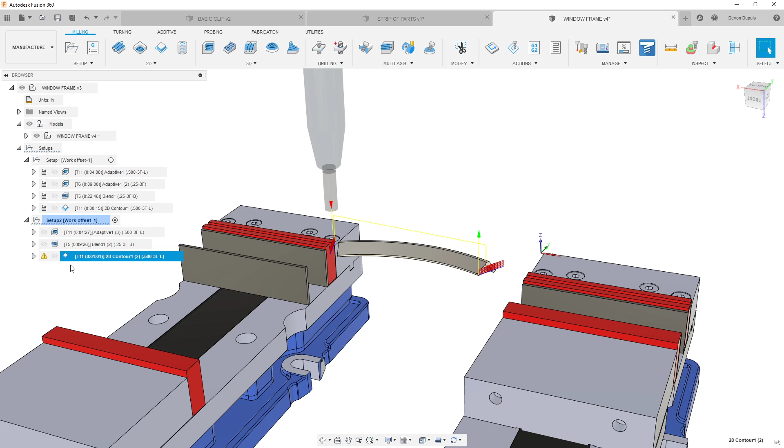And our warning here that we get is just that our open passes are linked with a both ways zigzag. We're always going to get that when we do an open contour with a ramp like this. So you'll always get that warning, but it's just telling you that something happened there. So we can simulate through this one more time and just play this to the end.

And there we go. We'll just grab these, and we'll let that generate for a second. But so I hope you guys got a lot of value out of this.

We'll check this out now. Sorry to cut myself off there, but this is going to come down here, and then obviously just take a little bit of the time to kind of reduce whatever chatter we would normally get with like a single heavy pass like that.

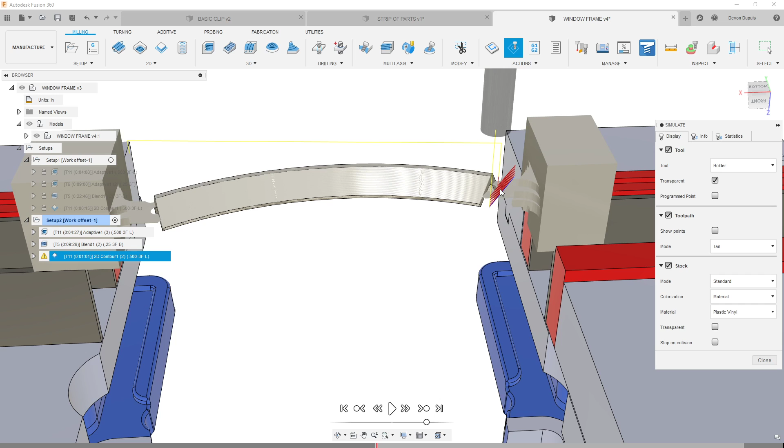And then we're just holding on to it by a little amount. Obviously, I made it big enough here so that we didn't bump into the part we were holding on to there. But this would be a really good way to tab this piece off.